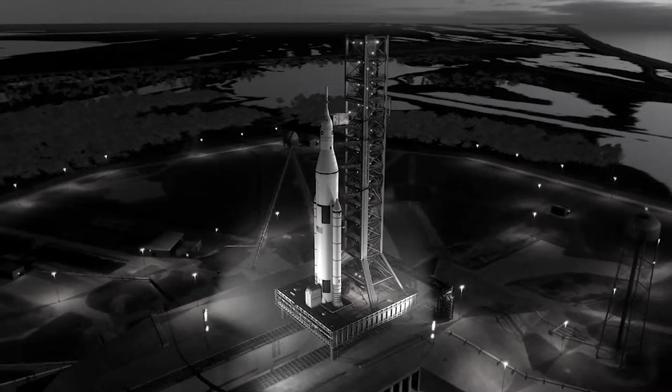The history of aerospace engineering is fundamentally a history of energy conversion, the struggle to translate the chemical potential energy of fuel into the kinetic energy of a vehicle with maximum efficiency.

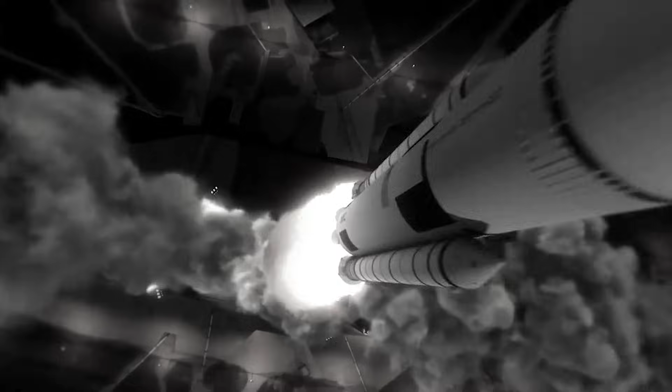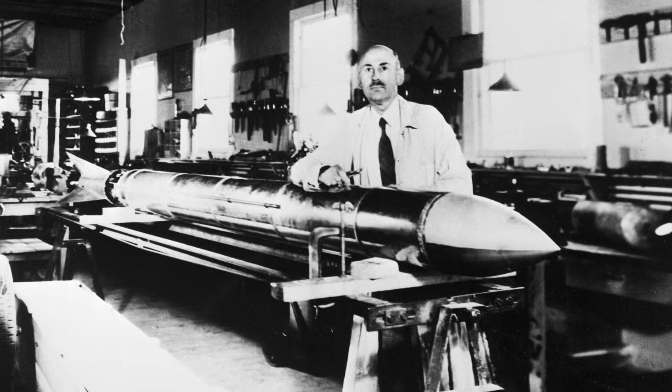In the early 20th century, rocketry was synonymous with black powder, a low-energy solid propellant that offered poor specific impulse and uncontrollable combustion characteristics. The transition from these pyrotechnic curiosities to the high-energy thermodynamic machines that define the modern aerospace era is largely attributable to the theoretical and experimental rigor of Dr. Robert Goddard. Goddard's work, particularly between 1915 and 1941, represents a systematic dismantling of the thermal and fluid dynamic barriers that prevented sustained supersonic exhaust velocities.

While his public legacy often focuses on the spectacle of the March 16, 1926 launch, his technical relevance to modern aero-engines lies in his mastery of two critical domains: combustion efficiency via the adaptation of the Laval nozzle, and thermal behavior through the development of regenerative and film cooling techniques.

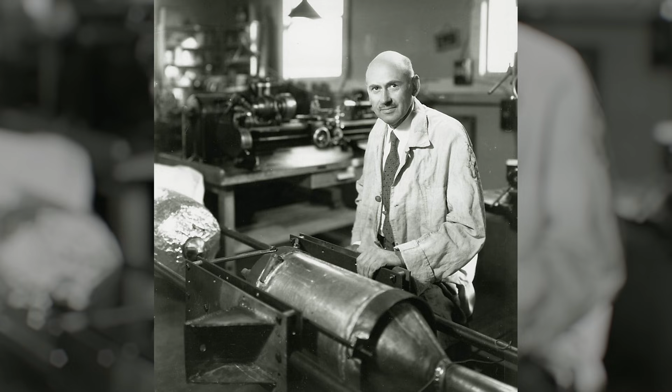The engineering challenges Goddard faced were not merely structural, but deeply rooted in thermodynamics and fluid mechanics. He had to conceive of a heat engine that operated at temperatures far exceeding the melting point of its constituent materials, and he had to devise a method to convert that thermal energy into directed momentum with an efficiency that surpassed the steam engines and internal combustion engines of his day.

This report provides an exhaustive analysis of Goddard's engineering methodology, examining how he applied the laws of thermodynamics to rocket propulsion to solve the complex problems of propellant atomization, combustion instability, and heat flux management that remain central to jet and rocket engine design today.

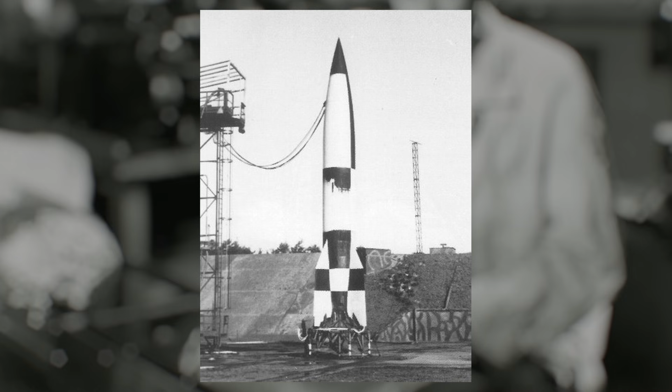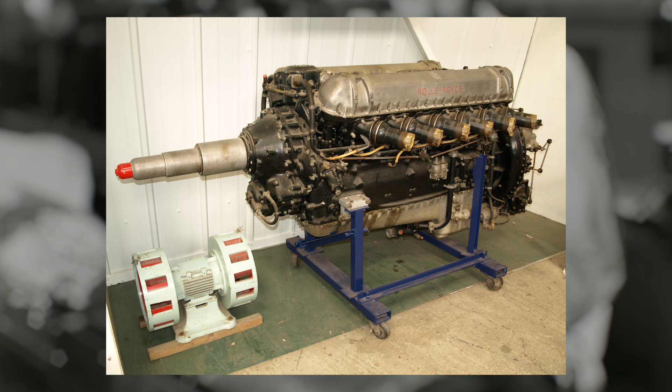In 1915, the state-of-the-art in rocketry was the Coston signal rocket, a device used for maritime signaling. Goddard's initial ballistic pendulum experiments at Clark University revealed a dismal reality. These powder rockets converted only about 2% of their thermal energy into kinetic motion. The remaining 98% was lost as waste heat, inefficient expansion, and unburned propellant. In contrast, the piston engines of the era achieved efficiencies of around 40%, and steam engines approximately 21%.

For rocketry to become a viable method of high-altitude sounding or interplanetary travel, Goddard realized he needed to close this efficiency gap. He hypothesized that the rocket could become the most efficient of all heat engines if the exhaust gases could be expanded properly. This realization marked the pivot from ballistics, the study of projectiles, to propulsion engineering, the study of thermodynamic cycles. Goddard's 1919 publication, A Method of Reaching Extreme Altitudes, laid the mathematical foundation for this shift.

He calculated the energy density required to escape Earth's gravity, identifying that solid fuel was insufficient due to its low exhaust velocity. His calculations pointed toward liquid hydrogen and liquid oxygen as the ideal propellant combination, offering the highest theoretical specific impulse. However, the engineering community and the public struggled to grasp the physics of reaction engines.

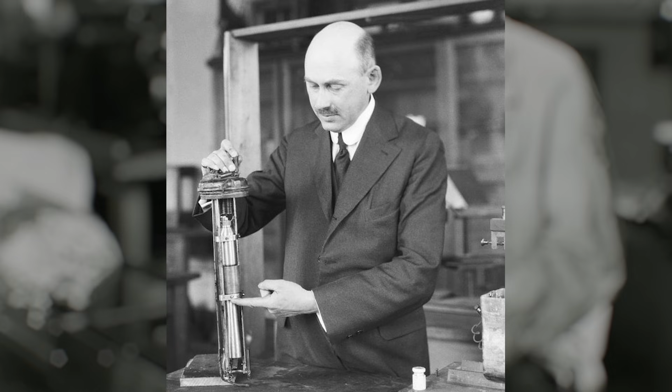The infamous 1920 New York Times editorial, which mocked Goddard for lacking the knowledge ladled out daily in high schools, stemmed from a fundamental misunderstanding of Newton's third law. The critics assumed a rocket pushed against the atmosphere. Goddard's vacuum chamber tests in 1915 proved definitively that thrust actually increased in a vacuum by approximately 20% compared to sea level, as the absence of back pressure allowed for greater expansion of the exhaust gases. This was the first experimental validation of the nozzle theory that would dominate his later work.

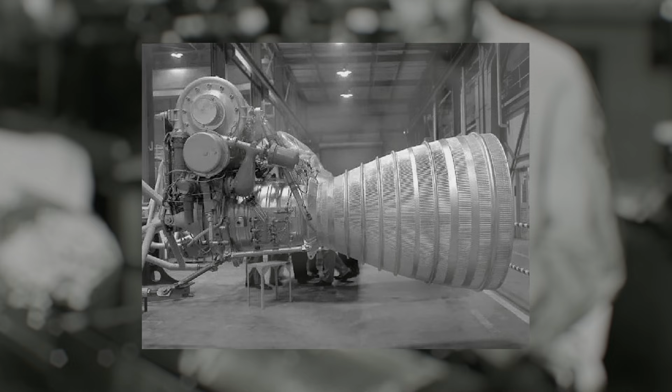The primary metric of a rocket engine's efficiency is its exhaust velocity. The relationship between thermal energy and exhaust velocity is governed by the conservation of energy, where the enthalpy drop of the combustion gas is converted into kinetic energy. To maximize this conversion, Goddard looked outside the field of rocketry to the domain of steam turbines, specifically the work of Gustave de Laval. The de Laval nozzle is a convergent-divergent device designed to accelerate a gas to supersonic speeds. It operates on the counterintuitive principles of compressible fluid dynamics.

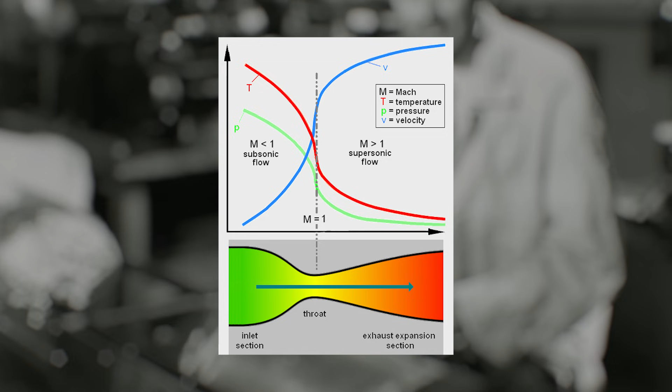In a subsonic flow regime, Mach less than 1, a gas accelerates as it passes through a converging duct, decreasing area. However, at the throat, where the cross-sectional area is minimal, the flow reaches sonic velocity, Mach 1. This is the choked flow condition. To accelerate the gas further into the supersonic regime, Mach greater than 1, the duct must diverge, increase in area. This is because, at supersonic speeds, the density of the gas drops faster than the velocity increases, requiring an expanding volume to accommodate the accelerating flow mass.

Goddard was the first to apply the steam turbine technology to a rocket engine. By threading various nozzle designs onto a solid propellant combustion chamber, he observed a dramatic transformation in performance. Velocity increase: jet velocities jumped from the standard approximately 1,000 feet per second of powder rockets to between 7,000 and 8,000 feet per second. Efficiency jump: the thermodynamic efficiency of the system leaped from 2% to approximately 63%.

This application of the de Laval nozzle essentially birthed the modern rocket engine. It transformed the rocket from a pressure vessel that vented gas into a sophisticated thermodynamic machine that managed enthalpy conversion into kinetic energy.

Goddard's early experiments primarily utilized conical nozzles. While easier to manufacture than the complex curves of a bell nozzle, conical nozzles suffer from divergence losses. In a conical nozzle, the exhaust gases near the nozzle wall have a velocity component perpendicular to the thrust axis. This radial momentum does not contribute to forward thrust, representing a loss in efficiency.

The bell nozzle, or contoured nozzle, which Goddard later approximated in his L-series and P-series rockets, minimizes this loss by turning the flow near the exit so that it is parallel to the rocket's axis. However, the manufacturing complexity of creating a regeneratively cooled bell nozzle in the 1920s and 30s forced Goddard to rely heavily on conical geometries with varying expansion ratios.

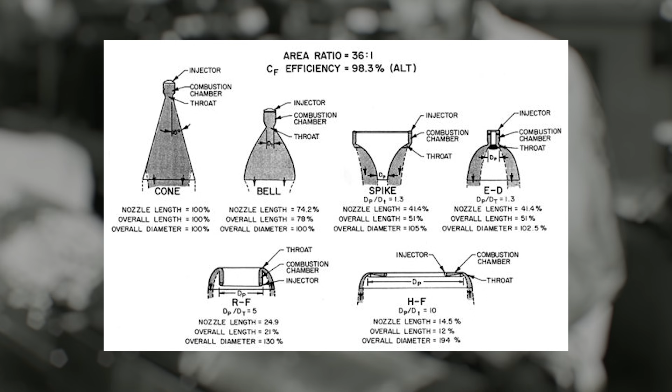The visual signature of Goddard's high-efficiency combustion was the presence of shock diamonds, also known as Mach discs, in the exhaust plume. These standing wave patterns are the visible manifestation of supersonic flow adjusting to ambient pressure. When the exhaust is overexpanded, as is common at liftoff for a nozzle designed for altitude, the ambient atmosphere compresses the plume inward. This creates oblique shock waves that reflect off the center line of the flow.

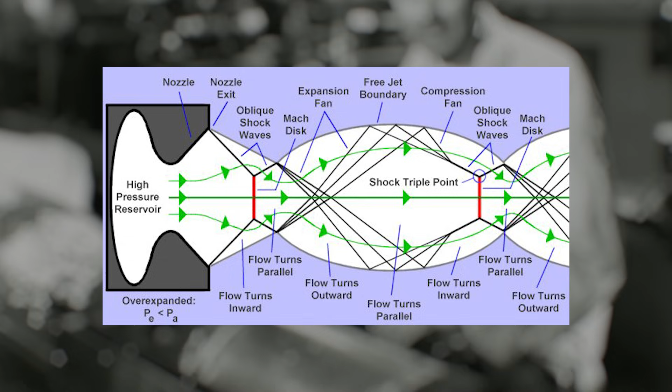Mechanism. The compression raises the temperature of the gas adiabatically. In Goddard's gasoline and liquid oxygen engines, the exhaust was typically fuel-rich to keep temperatures manageable. When the gas passed through the shock wave, the sudden spike in temperature and pressure caused the unburned gasoline to ignite, creating visible bright diamonds or discs in the flame.

Sensory evidence. Goddard described the launch not as an explosion, but as having a steady roar and a lack of smoke. This auditory and visual shift, from the bang of powder to the roar of fluid dynamics, signaled the transition to supersonic, continuous combustion. The shock diamonds were the optical proof that the de Laval nozzle was functioning correctly.

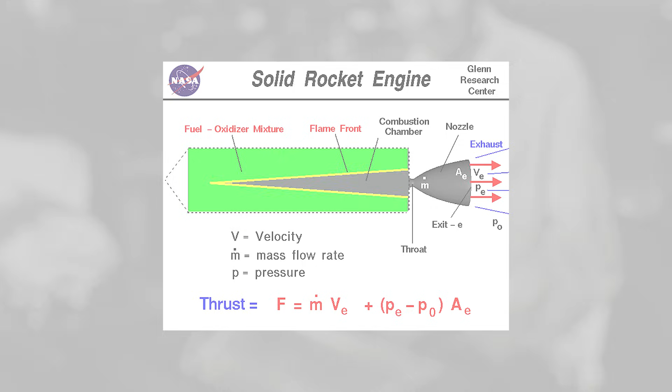Goddard's second major leap in combustion efficiency was the transition from solid to liquid propellants. While the Russian theorist Konstantin Tsiolkovsky had proposed liquid hydrogen and oxygen in 1903, Goddard was the first to tackle the immense engineering challenge of handling them.

In his early theoretical work, 1909 to 1914, Goddard correctly identified liquid hydrogen and liquid oxygen as the ultimate high-energy propellant pair. Hydrogen offers the lowest molecular weight. However, in the 1920s, liquid hydrogen was a laboratory curiosity, difficult to produce and store. Goddard made the pragmatic engineering decision to use gasoline as the fuel and liquid oxygen as the oxidizer.

The thermodynamic potential of liquid oxygen and gasoline is useless if the engine melts before the vehicle leaves the ground. Goddard's work in thermal management is arguably his most significant contribution to the longevity of propulsion hardware. He moved through 3 distinct phases of cooling technology, each more sophisticated than the last.

Initially, Goddard attempted to insulate the metal walls using refractory materials. He lined his steel combustion chambers with alundum, fused aluminum oxide, and placed layers of asbestos between the liner and the steel shell. In 1931, Goddard introduced a copper water jacket that fit snugly around the combustion chamber and nozzle.

Goddard is credited with the first practical implementation of regenerative cooling, a concept he had considered as early as 1923, but initially rejected as too complex. By the late 1930s, he had refined the technique. Alongside regenerative cooling, Goddard pioneered film cooling, which he referred to as curtain cooling.

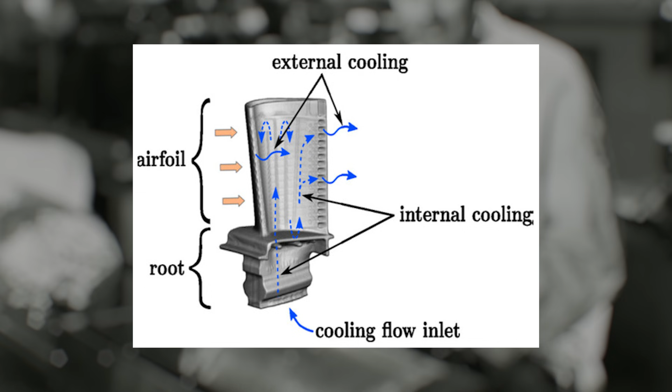Early Goddard rockets, like Nell in 1926, were pressure-fed. A tank of high-pressure inert gas, nitrogen, forces the fuel and oxygen into the engine. The penalty was, to hold high pressure, often 200 plus pounds per square inch, the propellant tanks had to be made of thick, heavy steel. This weight penalty made high-altitude flight impossible.

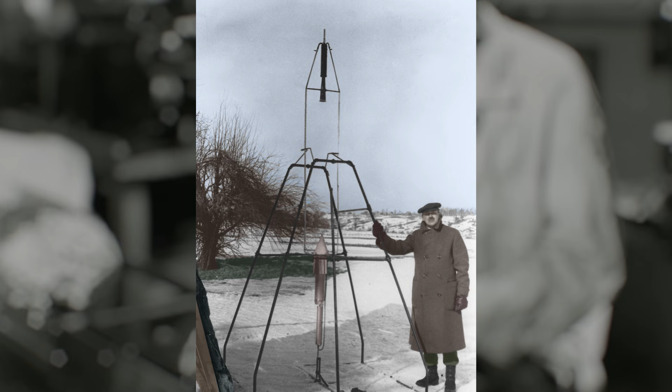So, to solve the weight problem, Goddard realized he needed low-pressure tanks, lightweight, and a high-pressure engine. The solution was the turbopump. Goddard's development was not a straight line, but an iterative process of failure and refinement. Analyzing his specific series reveals the evolution of his thermal and combustion strategies.

Dr. Robert Goddard's contribution to engineering is defined by his refusal to accept the thermal and efficiency limits of his time. He did not merely invent a machine, he designed a thermodynamic system. Goddard's work was the bridge between the intuition of 19th century inventors and the rigorous thermofluid dynamics of the space age.

Every modern aero-engine that utilizes a convergent-divergent nozzle or cools its walls with its own fuel is operating on principles demonstrated, often for the first time, in Goddard's lonely test stands in New Mexico. He proved that the barrier to space was not gravity, but thermodynamics, and he solved it.